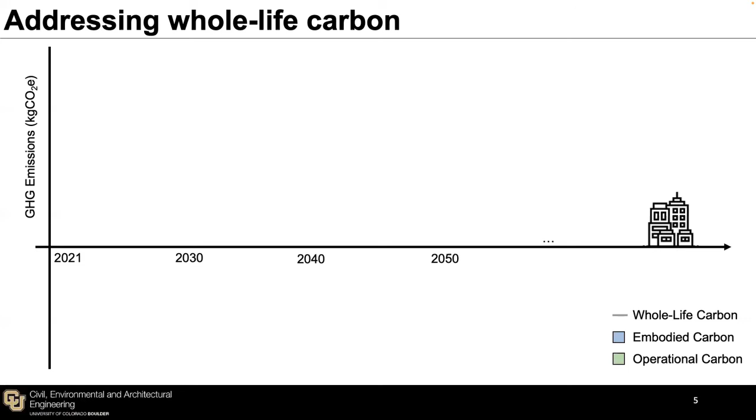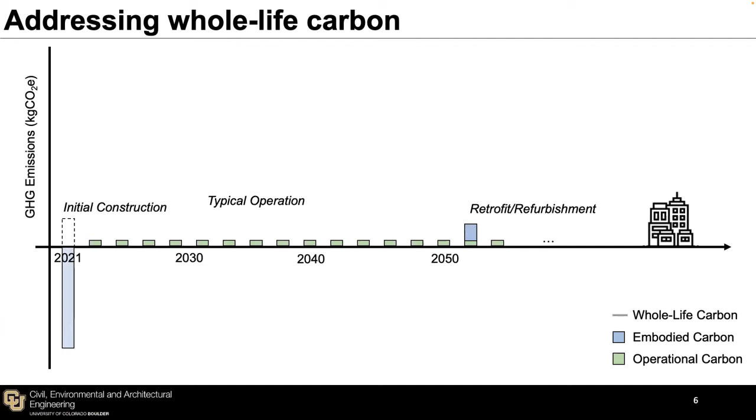So the framework that I've been working around is, okay, we're using bio-based materials. Is it possible, instead of having the initial emissions be positive in the greenhouse gas inventory, could it be "negative"? Are we actually able to store carbon in our construction materials enough that even when we are operating our building at near zero carbon efficiencies, the balance of a building over time might be one in which our buildings are part of the solution, storing carbon, and so identifying the opportunities for the built environment to become a carbon sink. This is the idea of what would need to happen for our buildings to be net stores of carbon and be regenerative within their architecture.

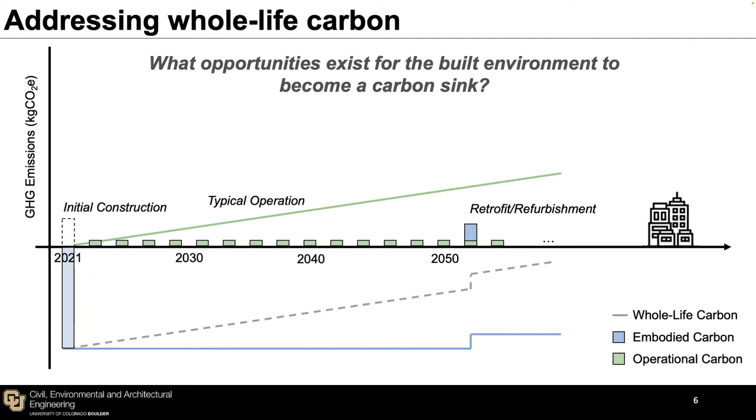It might sound a little bit far out in terms of, is that feasible? But let's take a look at the materials that might allow us to get there. So I want to talk now about carbon storing construction materials. Before I do, I want to be clear about some terminology. Over the years I've heard carbon sequestration and carbon storage used interchangeably when talking about buildings and construction materials, but I want to be very precise with their meanings.

Carbon sequestration is the active process of removing carbon dioxide from the atmosphere and turning it into something else. A great example of a carbon sequestration mechanism would be photosynthesis, where we are turning CO2 with water to make our cellulose, with a byproduct of oxygen. In contrast, carbon storage is the long-term or short-term storage of that carbon.

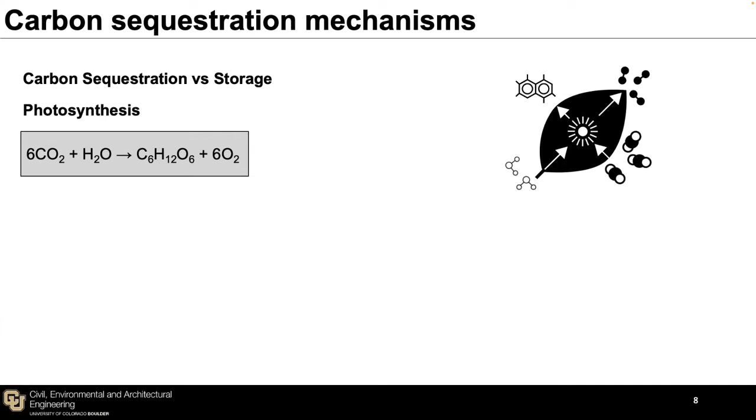So a construction material, the 2x4 that we pick up at Home Depot, that material didn't do any carbon sequestration. Our buildings aren't sequestering carbon in the context of bio-based materials. Rather, our buildings are storing carbon. It's a temporary thing on geological timescales because at the end of life, something is going to happen to that piece of wood or that piece of bio-based material. So that's sort of that differentiation between carbon sequestration and carbon storage. I bring this terminology up because it's very important for us to recognize that they're two separate things, and being precise in those words when we're thinking about the lifespan of a building that has construction materials is essential.

So another carbon sequestration mechanism is that of carbonation. This occurs in cementitious materials where calcium hydroxide or calcium silicate hydrates react with CO2 in order to form calcium carbonate. I'm not going to talk too much about concrete carbonation. Happy to dig into that another time if folks would like, around carbon storage or carbon sequestration and carbon storage of cementitious materials.

So what then are the types of materials that are bio-based and derived from things that have sequestered carbon and that are subsequently stored within them? I've just selected a smattering of materials. This isn't a comprehensive list, but we have dimensional lumber, engineered wood products, bamboo. These are all structural materials that we can use that store carbon.

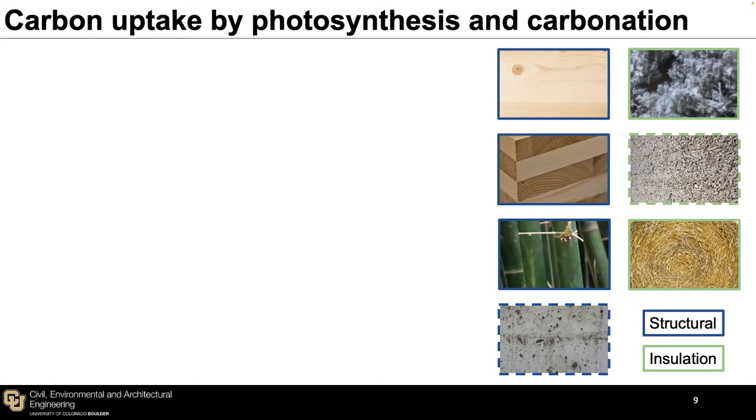We've got concrete down there with dashed lines to indicate that it's sequestering carbon through that carbonation mechanism. And then we have our insulation materials - depending on how you want to consider cellulose insulation, any other vegetal concretes like hempcrete, and then straw as insulation materials. So these are other materials that are derived from bio-based products.

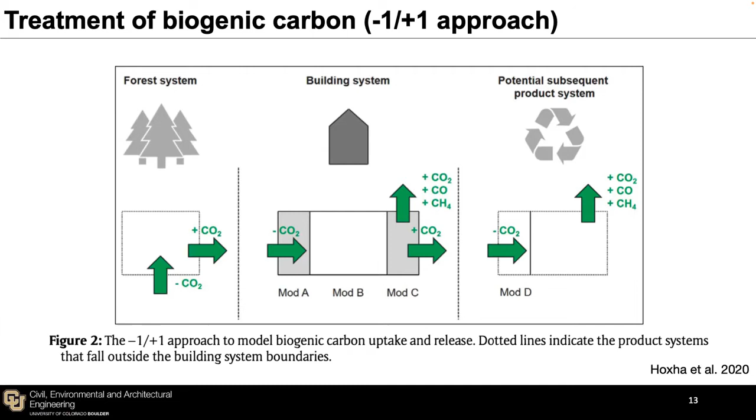And there's a limitation there: if we're treating that biogenic carbon the same independent of time, that really is independent of the climate system. And if we're truly worried about the climate system in addressing embodied carbon and what the climate impact of our decisions are, we need to consider its interaction with the climate. That's where the dynamic approach comes in—it takes into account the temporal nature of the uptake and release of the biogenic carbon. So in this way, we have a time-based approach where we are growing a tree and looking at the interaction of that tree with the atmosphere at any given point in time, and so the uptake and release of it as that tree grows.

So the tree's going to grow, sequester a good amount of carbon. Then we're going to see, all right, let's track that again, similar to the -1 + 1 when it enters our building system. We're going to potentially store that carbon or that biogenic carbon in our building system for 60 years, let's say. And then we're going to track the release of it, depending upon if it's released as methane, carbon monoxide, or carbon dioxide, depending upon whatever end of life scenario that we want to choose.

So the key thing to recognize around this dynamic approach for accounting for biogenic carbon, also referred to as a dynamic life cycle assessment or dynamic LCA, is it's much more complex. We have to understand what's happening in the climate at the same time that we understand what's happening in our forest system as well as our building system. And so we're integrating the climate, building, and forest systems all together in order to account for it. And so it is a little bit more complex.

And one of the primary nuances and points of debate is, well, when should we account for the growing of our forest system? If we're going to be using a piece of timber, say today, when was that tree planted? Well, if we're on a 70-year rotation period, such as common in North America, that tree was planted in 1952. So if we're going to start doing our carbon accounting and understanding the impact on the climate of that, we need to start our accounting back in 1952. And then bring it for the 70 years that we grew that tree. And then today, we're making a decision about what's going to happen with that tree, and then look 60 years forward, and then we're going to have an end of life.

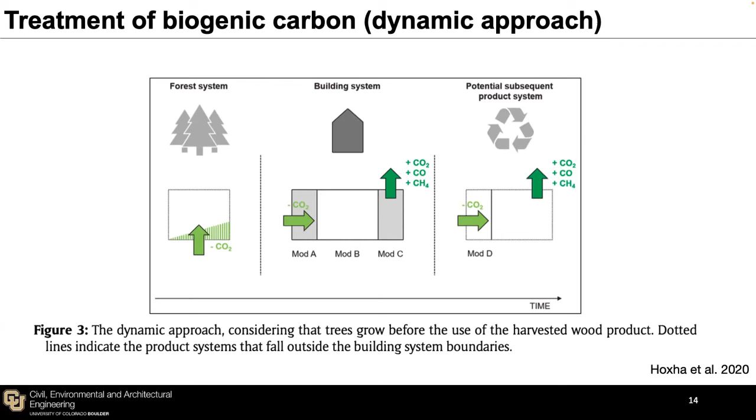And so the temporal dynamics of this is a little bit more difficult to take into account. And what were the decision makers thinking when they planted that tree back in 1952? Did they see the shift in mass timber happening? Were they concerned about the climate crisis and all that? Probably not when that tree was planted. And so that gets into the chicken and egg causality dilemma, essentially, of when do we say that the biogenic carbon that we are using and storing in our construction materials truly is having a benefit to the climate.

So in a backwards looking approach, that's what I just said, where we had the initial emissions of the planting, we grew that tree over time, and then construction starts, and then we're going to track our pulses of emissions going forward. And that's a backwards looking approach where we start our carbon accounting when we planted that tree.

In contrast, a forwards looking approach says, well, we didn't really know what that tree was going to be used for. Me as the building designer, that tree, as it's sitting right now in the forest, it's continuing to grow somewhat. It's continuing to sequester some carbon. There's other ecosystem benefits that are happening. And I say tree, it can be really any bio-based material. If I take that tree and just move it into my building, I like to say, all right, if I walk outside right now, cut down a branch of a tree and put it on my coffee table in my building, can I truly take a benefit for that?

Not necessarily. Just moving that carbon from outside to inside of our building is just a shift in the carbon pool. We're just moving it from one pool of carbon to another pool of carbon. It's not doing anything good for the atmosphere or for the system. Instead, the forward-looking approach considers, all right, I'm going to wait until I regrow that branch or regrow that tree in order to then take the carbon benefit for it. So it's a more conservative approach, and penalizes you initially for cutting down that tree, and then you're able to recover that over time. So this is what we see in a forward-looking approach. And both approaches are valid.

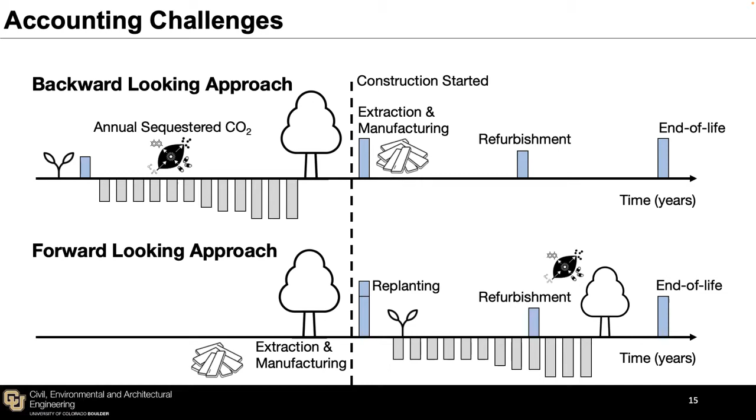There's arguments to be made for both of them, but typically backwards-looking approaches are more appropriate when your timber is being harvested from forests that have been planted in an afforestation effort, whereas a forward-looking approach is more appropriate when timber is harvested from existing forests that are currently there. Even if it's new growth, people still advocate for the forward-looking approach, and then we're subsequently replanting them. And so a lot of the academic literature around this really says that a forward-looking approach is the more conservative thing to do for buildings and is the more appropriate one to do.

So starting to account for that biogenic carbon regrowth between time 0 and then whenever the rotation period of that will be. So the dynamic approach, as I just described, it's a bit more complicated. And so that's why most accounting methods and the typical LCA practitioner or architect or engineer is not going to be wanting to get too into the nuances of this, since you have to understand a little bit of the climate effects. And it's not just as easy as multiplying embodied carbon coefficient by the mass of material. It takes a little bit more. So we can come back to dynamic LCA, and I'll come back to it here in a little bit.

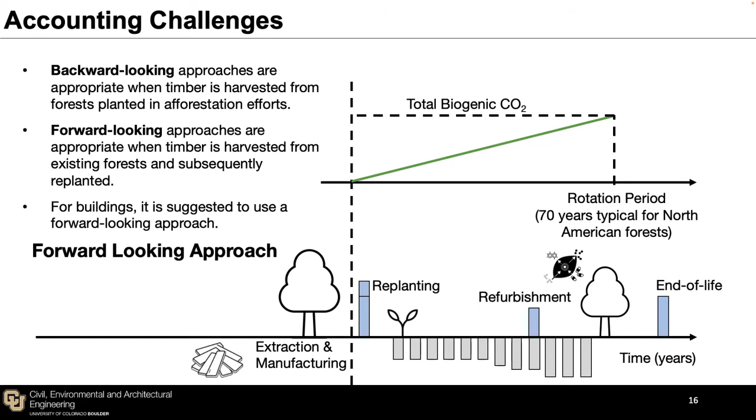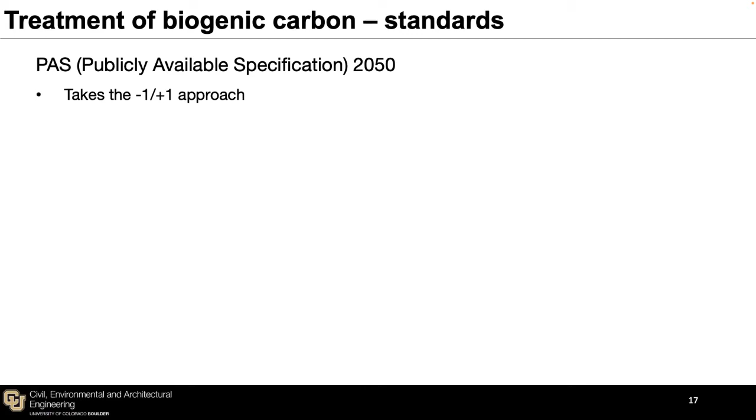So what do the different standards available to us today say? Well, the PAS 2050 method, it takes the -1+1 approach, where we have put a characterization factor of -1 kilogram of CO2e for every kilogram of CO2 that's sequestered. So that's where we get that -1.83 kilograms of CO2 sequestration per kilogram of material, based upon a 0.5 kilogram of carbon per kilogram of material carbon content.

They then say, all right, in module B, you get to take a temporary carbon storage benefit, and there's a function for that. But if you're storing that carbon for longer than 100 years, then you're able to consider that carbon as permanently stored. Even if in year 101, you just burn it and put it right back in the atmosphere, this accounting method allows you to take a full carbon storage benefit for it.

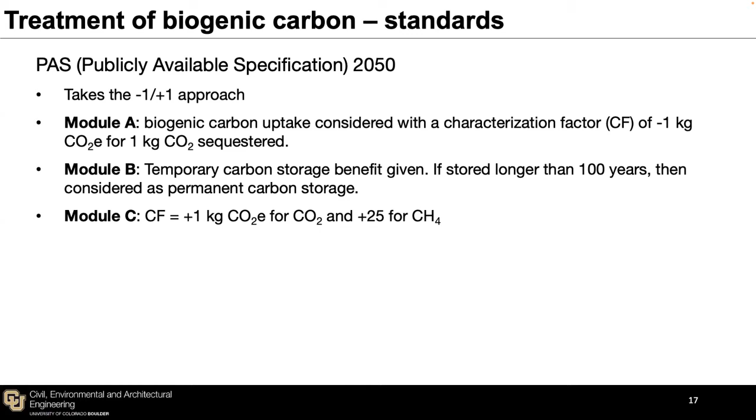And then in module C, it's just using our typical characterization factors: 1 kilogram of CO2 equivalent for emitting 1 kilogram of CO2, and then 25 kilograms of CO2e for emitting a kilogram of methane, just our typical IPCC characterization factors. And I won't get into land use change, but there is some stuff done around direct land use change, but nothing around indirect land use change. So this is what's commonly implemented by most folks around biogenic carbon. I'd say it's one of the more prominent accounting methods that's been adopted.

Similarly, the ILCD, the International Life Cycle Data System, they follow this -1+1 approach with then a temporary carbon storage benefit given depending upon how long you've stored it for. And I think if you're over 25 years, someone might correct me if I'm wrong, but there's a plateau that you get to after 25 years.

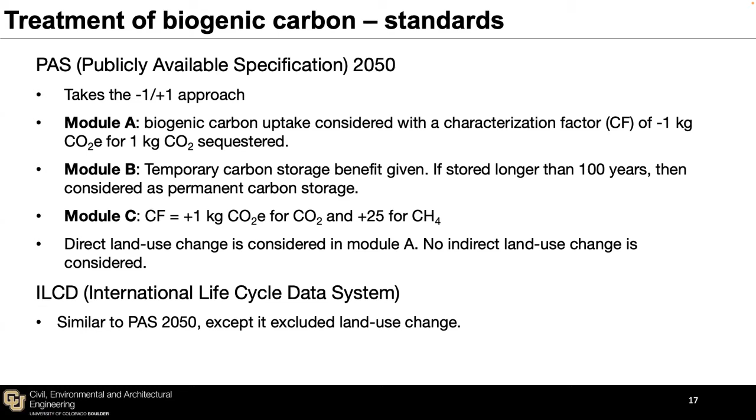So that's some standards, but what's done actually in practice? What is done in our environmental product declarations, or our EPDs? Typically our EPDs are taking a -1+1 approach. They're saying, yep, there is some biogenic carbon here, but we're taking that -1+1. And this is limited though, as EPDs are typically only cradle to gate, especially our industry average wood EPDs. We can take a look at those too if we'd like. Yeah, I pulled this from the industry average one where we're just looking at cradle to gate, A1 to A3, for those EPDs.

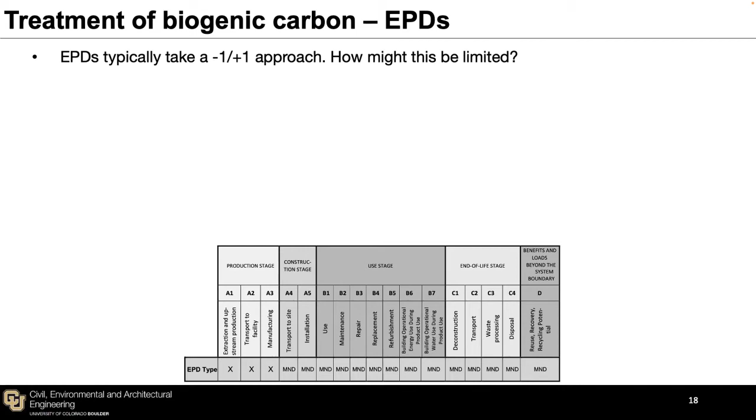So if we're taking that -1+1, well, only the -1's occurring in the A1 to A3. So how are they dealing with that +1? They're taking a biogenic carbon credit through this one ISO standard. There's an ISO standard that says if you have a sustainably managed forest, and that might mean if you have a certified wood product, if you're FSC or even SFI certified, you get to say that you have a sustainably managed forest. I'll leave the debate around these two different certification methods for another time. But if you know that your wood's coming from a certified forest, you get to take the biogenic carbon credit.

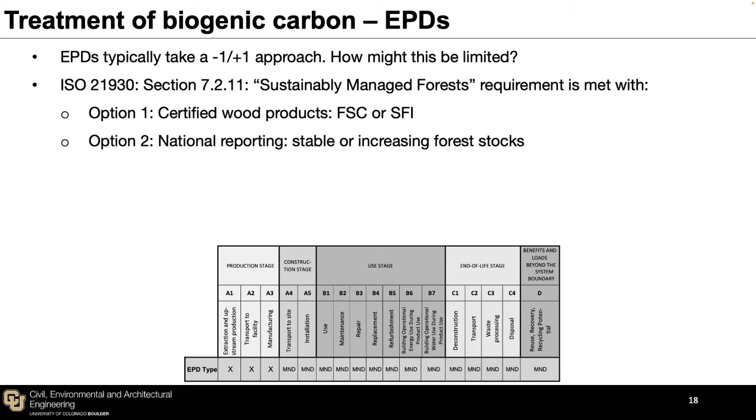Or if nationally, for all the forests in the US, we have stable or increasing forest stocks. What that means is nationally, if our forests are increasing and we are using harvested wood products in our buildings, we get to take a full benefit of that biogenic carbon. Even if on my specific forest I am deforesting it and just clear cutting everything, I could still take this within my EPD and say that I am doing good and take a biogenic carbon credit, even though I'm contributing to deforestation, because nationally we're doing a good job. So you can see why this is a little bit limited in what's being done in EPDs.

And so if you're able to take a credit, so if you're coming from a sustainably managed forest through one of these two options, then you get to say, all right, when biogenic carbon enters your system, you get a characterization factor of -1. And then when it's leaving the system, you say it's then +1. So you're just essentially implementing that -1+1 approach. So this is what's done in our EPDs.

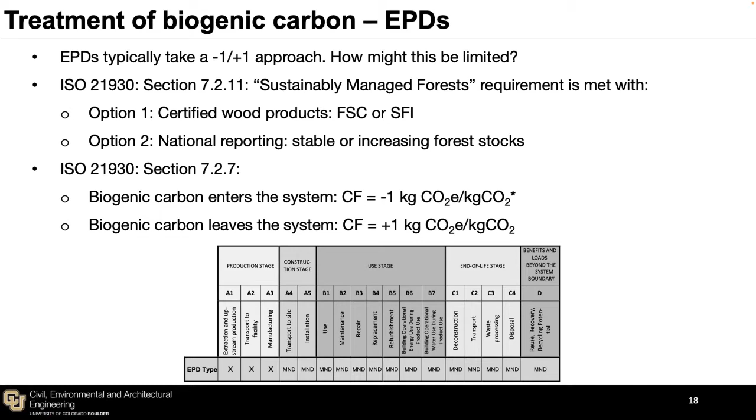And if you go read through the nuances of the AWC EPDs for softwood lumber or the engineered wood products ones, you'll see that there's some addition that happens with the end of life stage that gets pulled into module A3 there. Okay. So that's what's done in our EPDs around this. And this -1+1 then also follows us through our different LCA tools.

So if we look at Athena, and we look at what the end of life assumptions are, how are they dealing with that? They take that -1, they don't put it in module A, they put it in module D, but how are they doing that full accounting for that biogenic carbon? Well, they're assuming that 80% of any wood product goes to a landfill, 10% to recycling, and then 10% to incineration.

Some of that landfill goes into aerobic and anaerobic digestion, depending, and so you get different emissions factors on that when you go look at your life cycle inventory. And then there's the assumption that 87% of the wood that goes to landfill is permanently stored, and 13% decomposes.

So what this means is that even if we take a harvested wood product, we cut down a tree, put it in our building, and then stick it in a landfill, nearly 70% or 69.6% of the original carbon that was stored in that wood is assumed to be permanently stored in the landfill. And only 30% of that carbon is then released back into the atmosphere as different greenhouse gases, depending upon the landfill, into our methanes, our carbon dioxide, and nitrous oxides.

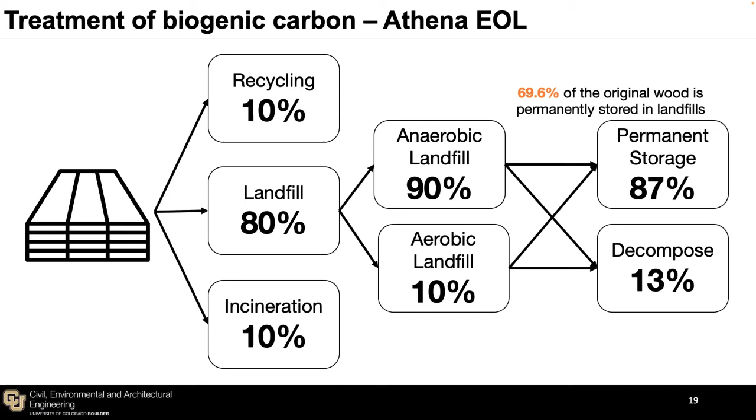So this is what Athena does in saying that 70% of the carbon that's sequestered by a harvested wood product stays that way. Tally does something similarly, except it has different numbers of assuming what happens at end of life, where 15% is recycled, 64% in the landfill, and then 22% incineration. And then assuming that 50% of it decomposes in the landfill, and 50% is permanently stored.

And so this is where now you get that 32% of the original wood, by mass, that was put into your harvested wood product is then permanently stored. That carbon is permanently stored in the landfill. And so this is what is done in Tally.

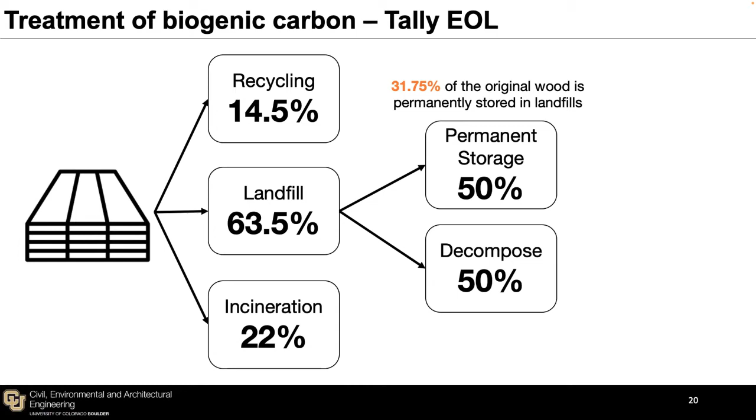And if we look at an example of how this all works for Tally, and I'll just skip to the results here: if we're excluding biogenic carbon, even when we take the benefits beyond life in module D, we're still getting a positive value, but when we include it, we get a negative value, showing that over the entire lifespan, more carbon is sequestered and stored in that construction material, even at the end of life, than was emitted in its manufacturing.

So this is how the tools that we are using as building designers are treating biogenic carbon, really on that -1+1 approach. The -1+1 approach I find to be quite limiting in the fact that most of our climate goals revolve around 2050. We have to have a net zero built environment by 2040, I think I have that number right, if we're going to meet that 1.5 degrees Celsius. I don't have the current IPCC report numbers around that. That's really what's being asked.

And when we think of regrowing a forest when we specify a piece of lumber, that's going to take 70 years from now. So we're pushing 2090, assuming the trees are able to grow the same in the new climate as in the past climate.

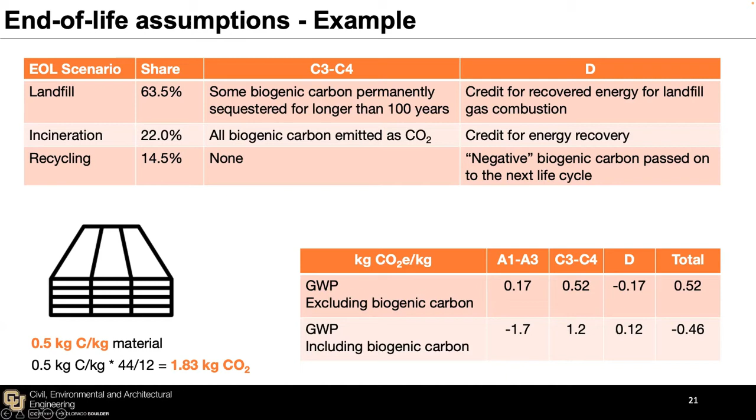So as you're building truly net zero carbon, if say you got your zero energy and you're doing really good on your biogenic carbon side. And I'd argue that no, you can't take that benefit until well after this. And when we actually look at the climate dynamics of it, we're not doing as well as we could be. So I'll illustrate this with a different metric than global warming potential, and that is global temperature change.

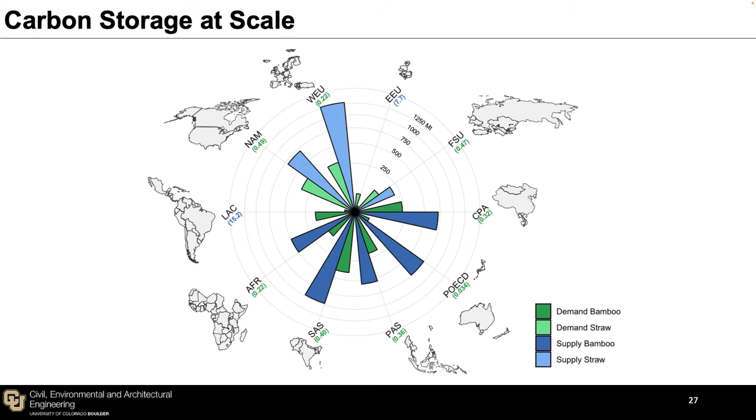So if there's one thing that you take away from me talking today, it's that biogenic carbon's tricky. It requires a nuanced accounting approach, and there are limitations to the -1+1. Those are the takeaways I want you to have from me talking. So conceptually, I've put this together. This is primarily a good conceptual representation of all this.

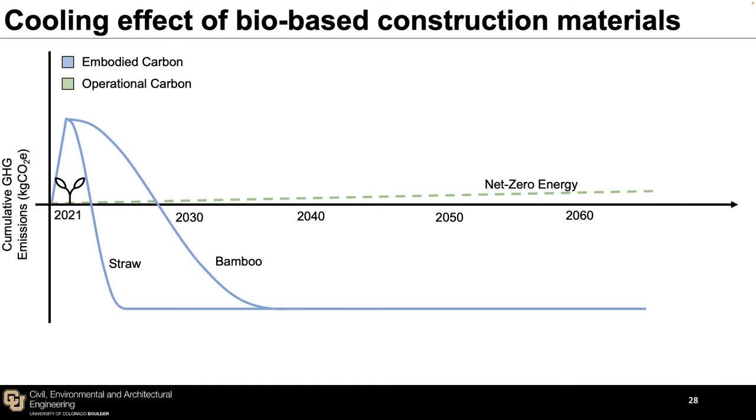When we zoom back out to, okay, what am I going to do for my project? Well, if we have a net zero energy building that we're designing, it's nearly net zero carbon. There's going to be that initial pulse of our embodied carbon. But as we regrow with different materials, if we regrow with straw, we're going to get an immediate cooling effect. If we build with bamboo, we're going to get a little bit less of that, but it's still going to occur fairly quickly. If we're using short rotation timber, we're going to get there too, but it's going to take a little bit longer. And if we're using long rotation timber, it's going to take much, much longer. So those are the key takeaways to have from my talk.

And then, yes, at the end of life, many things might happen. My perspective on end of life right now is we should not fuss too much about end of life when we're performing a life cycle assessment of a building today. Instead, we should take all the energy that we might put into fussing about the end of life and put that energy into figuring out how to make our buildings last longer. Because extending the lifespan of our buildings is going to have much more of an effect than worrying about what's going to potentially happen at the end of life 60 years from now.

If we look 60 years back, I think we'd be aghast at what we currently have in terms of technology. And so spending too much time around end of life, well, yeah, it's important and we need it for doing LCAs for LEED and whatnot. Yes, I get that, but I wouldn't worry too much about it and focus more on extending the lifespan of your buildings. So that's what I have for you.

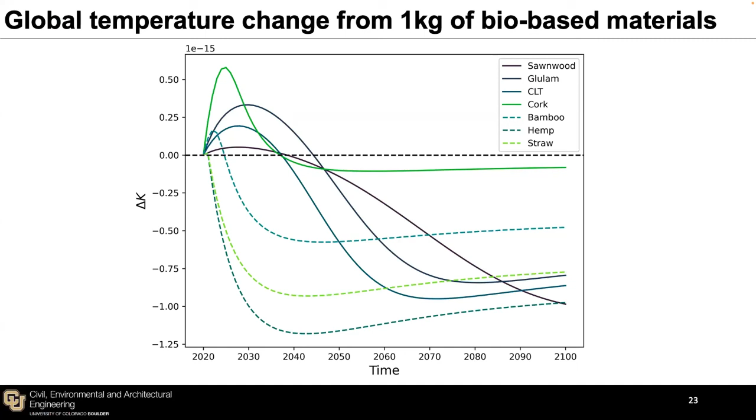No, I always forget my audience, so thanks for bringing it back. So this one that you're referring to? That one, or the one I think after it. This one? Okay, so just like the mechanics, right? How is straw actually doing that carbon sequestration in the building?

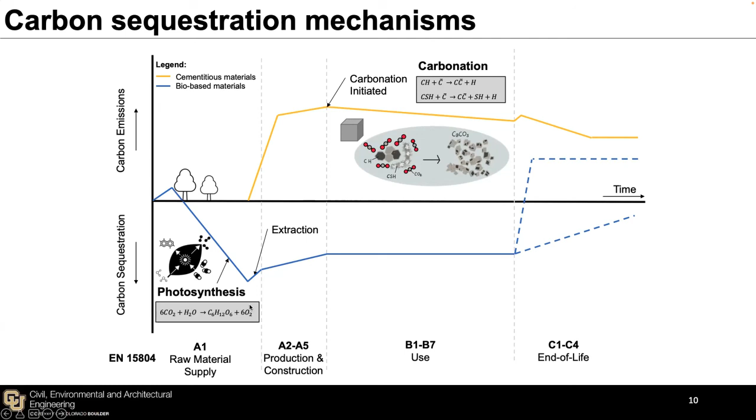So the straw, we grow the straw during that uptake. So let's go back to this one. We grow it, and there's a little bit of emissions from the planting of the straw. We grow that straw very quickly, and the carbon balance, or the ratio between the emissions and the sequestration of straw, is much more in favor of sequestration.

So there's significant carbon uptaken compared to the emissions. What's being shown here is essentially saying: we sequestered all that carbon with a rotation period of one year. So all that carbon came in, and it takes one year to regrow all that. Because if we had just left that straw out there, well, that grass would be living. It's a bit of a different conversation for short-lived crops versus trees. But the crux of this is it takes one year to grow that back, and so we get that full credit back immediately.

So even if we took that straw, put it in our building for two years, and then just burned it, we're still having a net benefit because we took carbon out of the atmosphere for a bit of time before putting it back in. So we're getting a little bit of delayed credit there, whereas if we store it for a long period of time, we're getting much more. And this is just for one product here.

So that's where it becomes a compounding effect if we started looking at one piece of land. If we take one unit of land and grow fast-growing stuff on it, the carbon balance of that piece of land is going to be pretty stable. We're essentially using photosynthesis as that carbon sequestration mechanism, think of it as a factory pulling CO2 out of the atmosphere and pumping out construction products. That's how the straw gets the increased benefit for those faster growing ones.

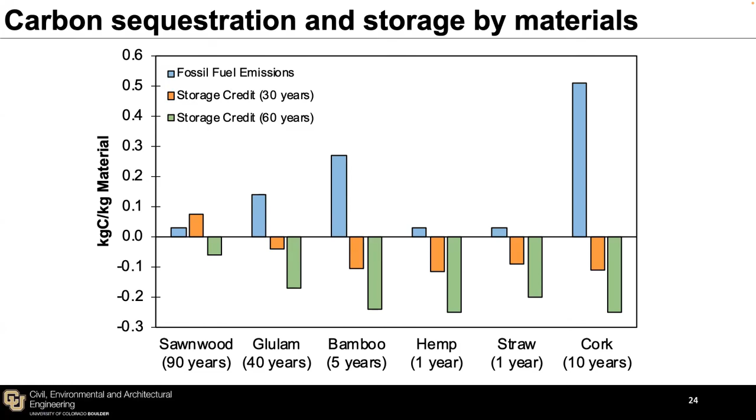Okay, and we can't really compare between these materials because they're not functionally equivalent, right? They're just one kilogram of material. Yeah, that would be a good point to make, right? Like how much... Again, it's so complex, right? Thank goodness there are people like you that understand it better.

Yeah, and it's trying to figure out how to get... because currently there's not a good metric out there to make it simple. That's something we're working on, to figure out how to get some more simple metrics out there for inclusion. Okay, thanks.